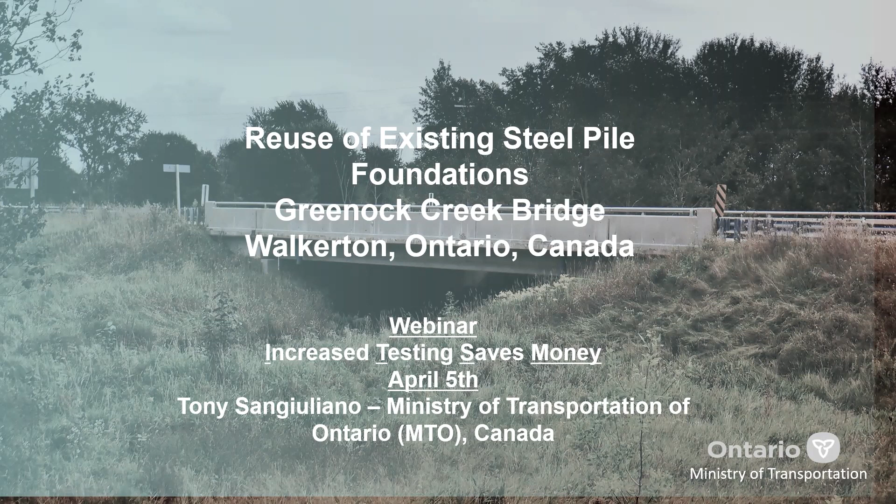What I want to do today is share with you not only a case study related to the reuse of existing steel pile foundations, but also slant the presentation towards the significance and importance of making smart investment decisions, and specifically, investing in testing.

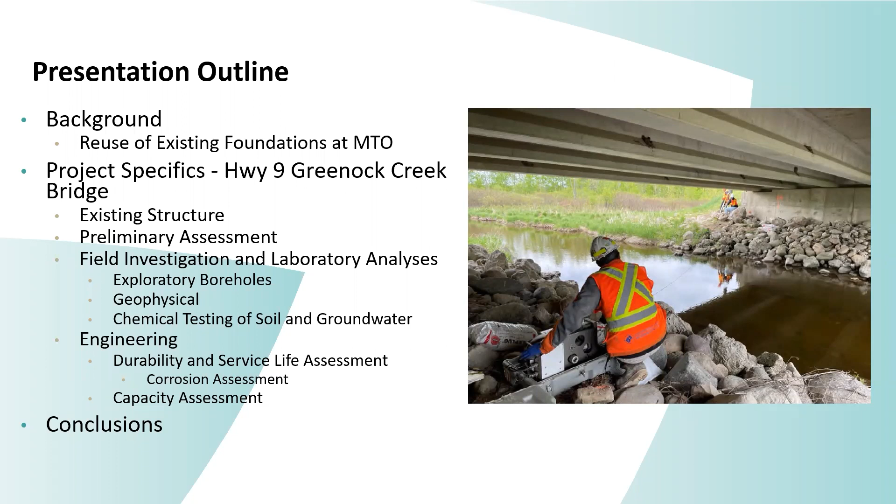Before I do that, as you see my presentation outline, the very first bullet, I just wanted to get the Ministry of Transportation of Ontario on the radar for you folks. I'd like to talk a little bit about our infrastructure and our commitment to sustaining it. Then I'll get into the details of the case study, a project in one of our five regions, West region specifically. There's a number of things I want to share with you, and then I'll make some conclusions.

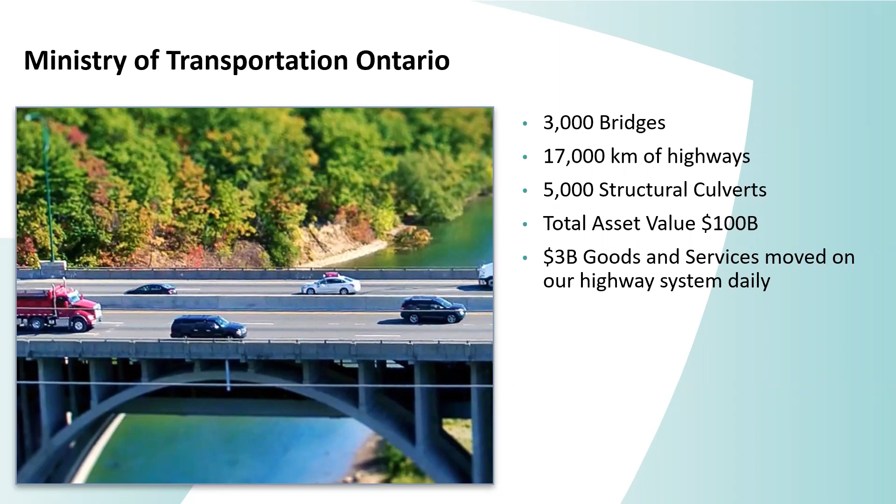With regards to our infrastructure, as you can see on the right-hand side, in our inventory we've got about 3,000 bridges, about 17,000 kilometers of highways, about 5,000 structural culverts, and about 50,000 non-structural culverts. Our total asset value is about 100 billion. We take a lot of pride in moving Ontarians safely, reliably, and efficiently, and in doing so, encouraging economic prosperity. That's why we move about $3 billion of goods and services daily on our infrastructure.

So a big part of our mandate, and certainly one of our priorities, is to sustain our infrastructure through smart investment decisions and innovation. Testing and investing in research type projects is something we take a lot of pride in.

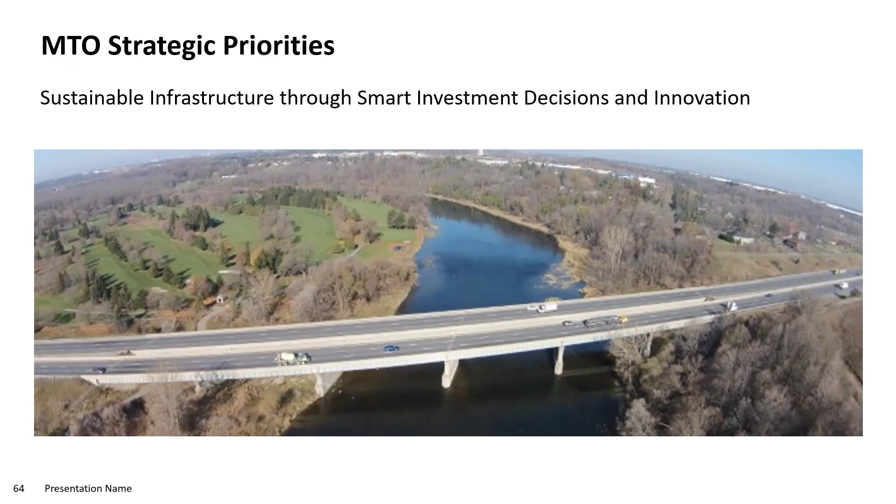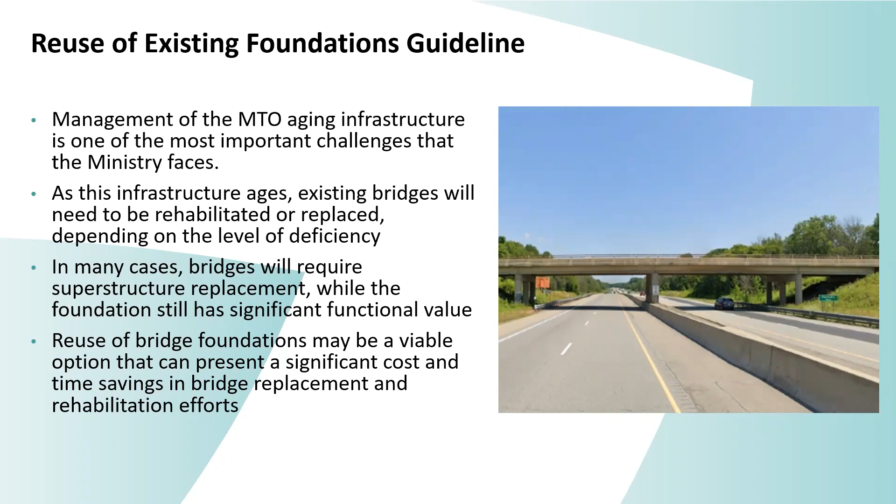One of the areas we feel is beneficial to pursue moving forward, and where we've gained some momentum, is looking at the reuse of existing foundations. With our infrastructure aging, we need new ways of doing things to be more cost effective and more responsible to our taxpayers. So one of the things we're doing is looking more and more into reuse of existing foundations, as opposed to just building new foundations and new structures entirely. With that, there are a lot of benefits: cost, minimization of traffic disruption, schedule, and environmental benefits as well.

So there's a process, and we've got a draft guideline that we've used and will continue to upgrade, because we take a lot of pride in our technical leadership. The process starts with a preliminary assessment, then you go through a risk analysis, a life cycle cost assessment (LCCA), and then a detailed assessment, which looks at the capacity, the extended service life, the durability, and the integrity of the particular foundation system.

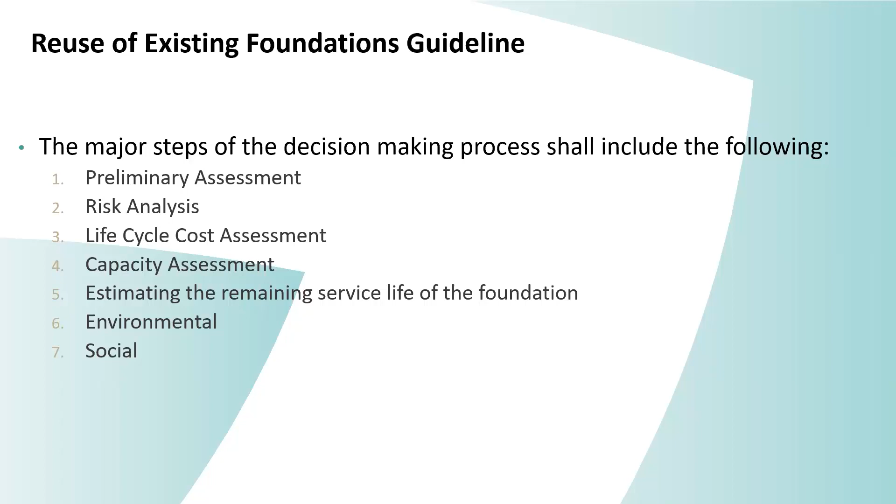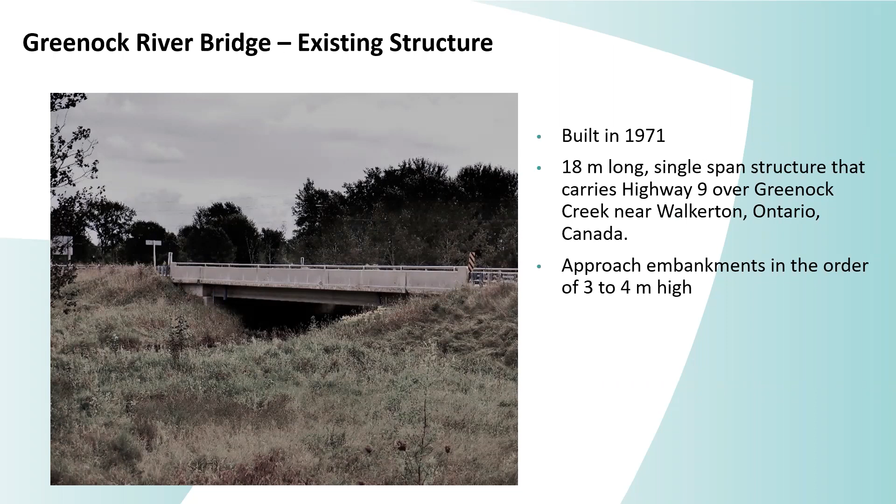So at this particular site, the Greenock River Bridge, it's an existing bridge. You can see by the photo that the superstructure is not in the best condition. It was built in 1971. It's a single span structure, about 18 meters long, with approach embankments about 3 to 4 meters high.

The existing abutments are founded on driven steel H piles, 11 at each abutment for a total of 22, about 8 meters long. The piles are battered, which is important as I will describe later. The piles were originally designed to carry a particular load: 70 tons, or in metric, 630 kilonewtons per pile.

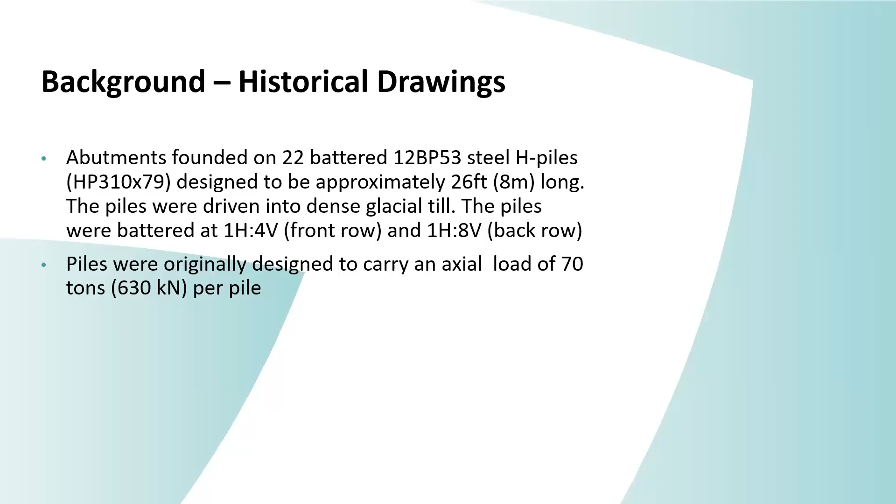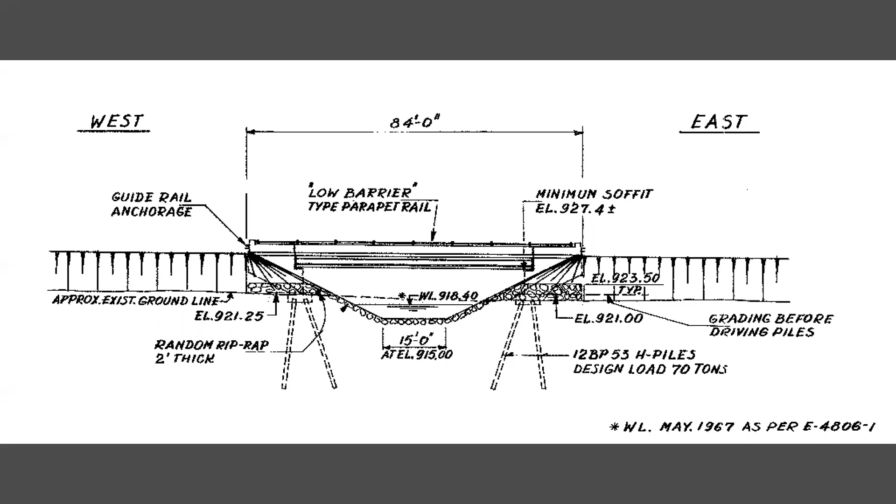The piles are 310 by 79 piles, our go-to foundation system in this neck of the woods, because of the availability and the conditions that we have here.

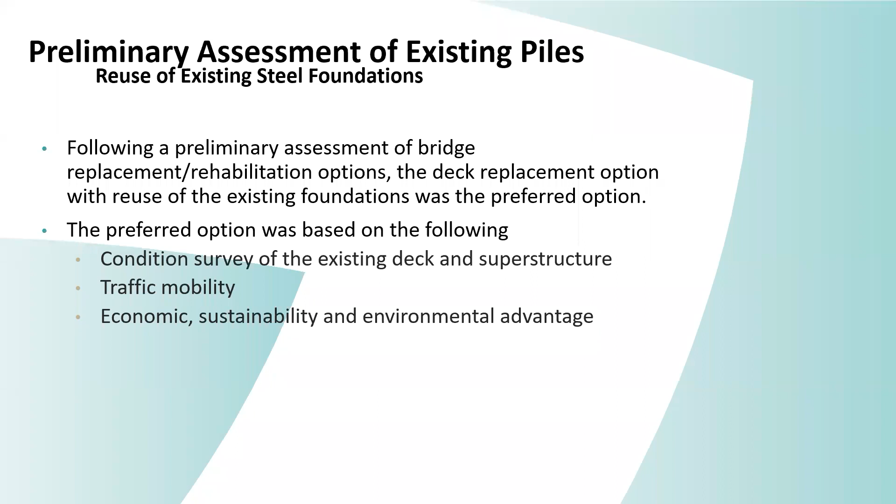So then we proceeded into the detailed assessment of the existing piles, and this is where the investment in testing comes into the picture.

At this particular site, as you can see by the close-up slide on the right, the preferred method to investigate existing piles is what we call a direct approach, where you try to expose the piles if the site and subsurface conditions enable you to do that.

But unfortunately, at this site, the conditions were challenging. As you can see in the foreground of the picture, there was water, and the subsurface conditions involved cohesionless soils, so we had an issue with dewatering requirements and challenges with temporary shoring systems.

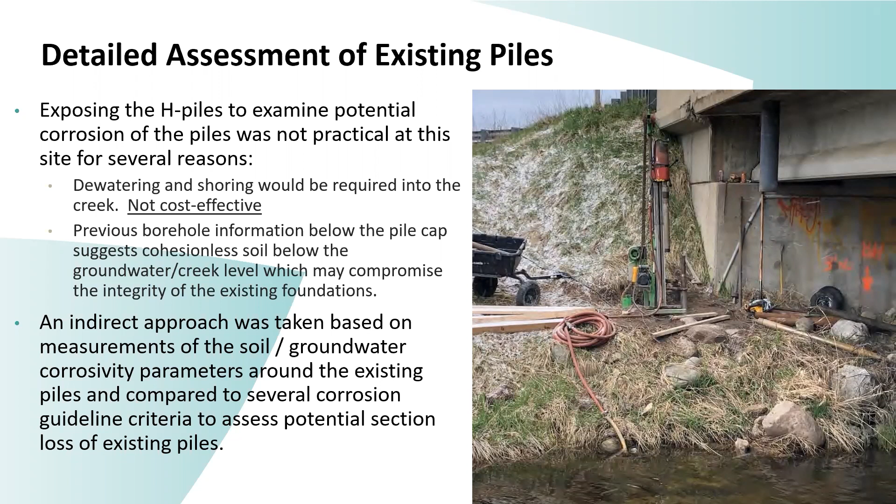So we chose an indirect approach to make an assessment of the existing piles, and I want to share with you what we did. It was a three-prong approach, and the first prong was the advancement of exploratory boreholes.

With the exploratory boreholes, we advanced a total of 6, as you can see here, the solid dots, and we had some previous boreholes as well. From these 6 boreholes, we were able to determine the subsurface conditions.

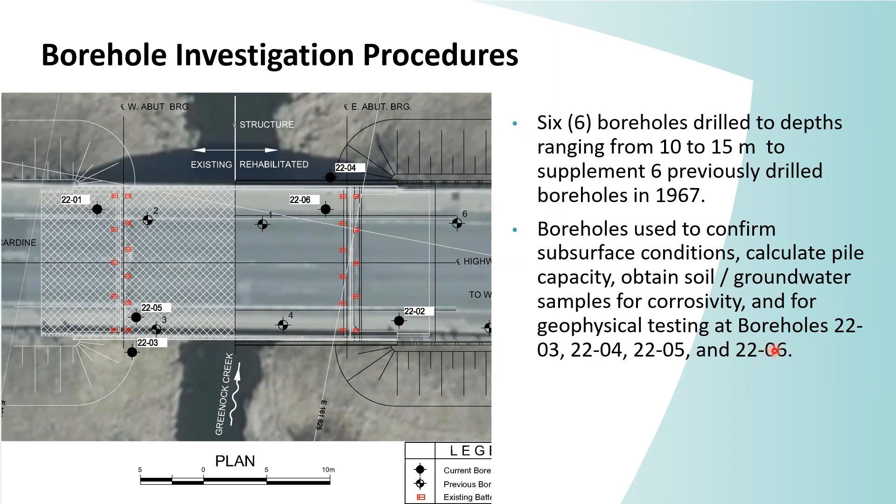We chose the selection of these borehole locations very carefully, because we coupled the exploratory boreholes with some geophysical testing at some of the borehole locations, specifically 03, 04, 05, and 06. I'm going to share with you what I mean in terms of selecting the locations and how we actually advanced the boreholes.

Some of the boreholes we drilled from the roadway surface, and we tried to get those locations as close to the abutment pile locations as we could, as illustrated in the slides on the left, where we advanced boreholes off the roadway. We used portable equipment, as illustrated here in the photo on the right, still trying to get as close as we can to the abutment to enable us to do the geophysical testing afterwards.

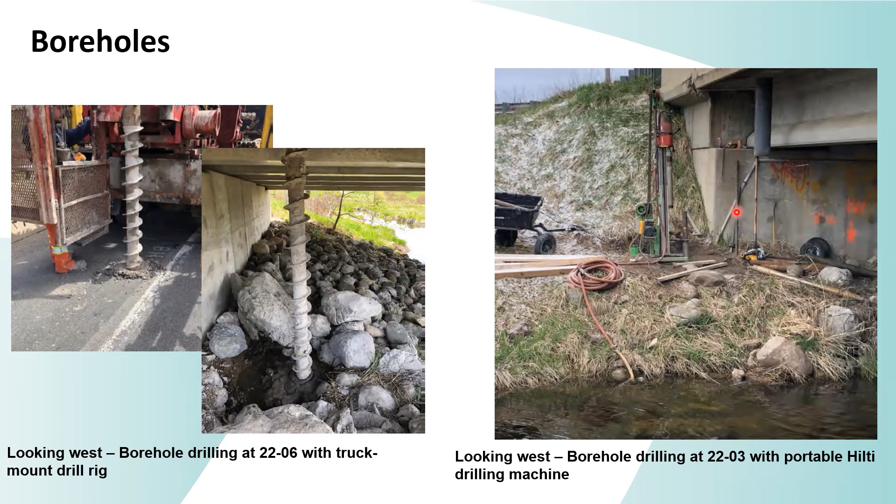In terms of the subsurface conditions, there needs to be a determination of them to assist in the capacity assessment of the pile, which I'll get into a little bit later, but also to assist in the service life or durability part of the assessment.

You could see on the slide here that the subsurface conditions determined were comprised of some fill, underlain by a thin layer of cohesive silty clay to clay silt, which was in turn underlain by a sand and gravel deposit. But the predominant deposit was a silty, sandy till of glacial origin, and you could see from the slide here that the piles in red are founded on that very competent silty sand till.

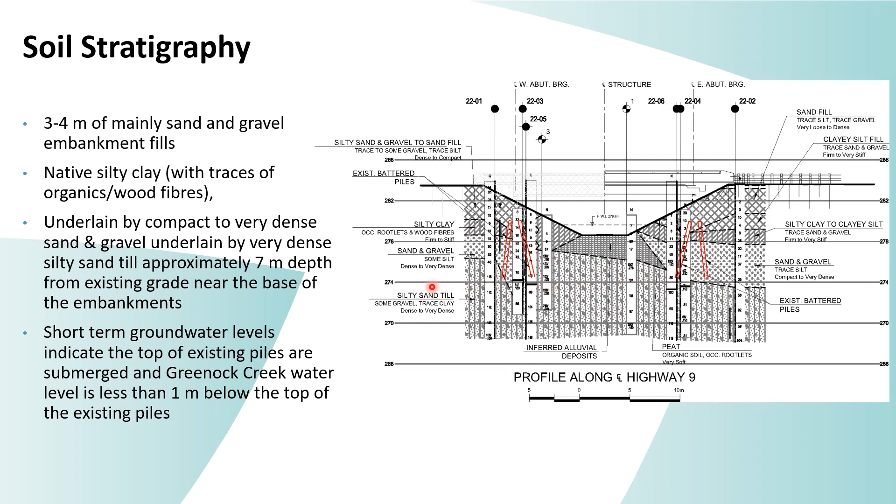Then we proceeded to the second prong of our testing, our investigation. What we did is we applied 4 different geophysical methods to enable us to determine the embedment length of the piles.

Unfortunately, we didn't have any as-built drawings. We had design drawings, and we kind of knew that the piles were 8 meters in length, but we needed to validate and verify that.

Consequently, we used 4 different geophysical methods: a parallel seismic method, a borehole magnetometer method, an electromagnetic method, and a natural gamma method. So we used the boreholes that we advanced, and then applied the different methods.

The boreholes were advanced below the expected tip of the deep foundations. The essence of all these tests is to look at variations going from the bottom of the hole. We put in a 2-inch PVC, grouted the annular space, and started from the bottom of the hole using either a geophone for the parallel seismic method, or a magnetometer for the borehole magnetometer method, going from the bottom and then in decrements upward to look at variations or changes with depth, so that we could ascertain the embedment lengths of the piles.

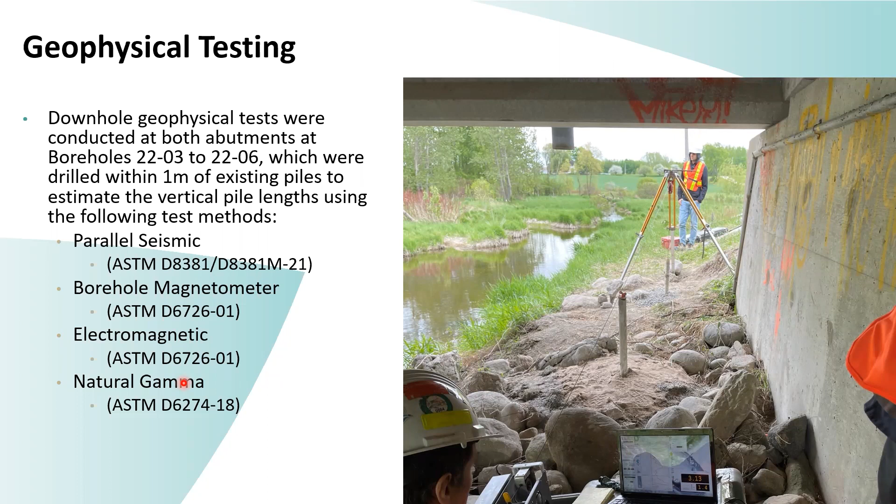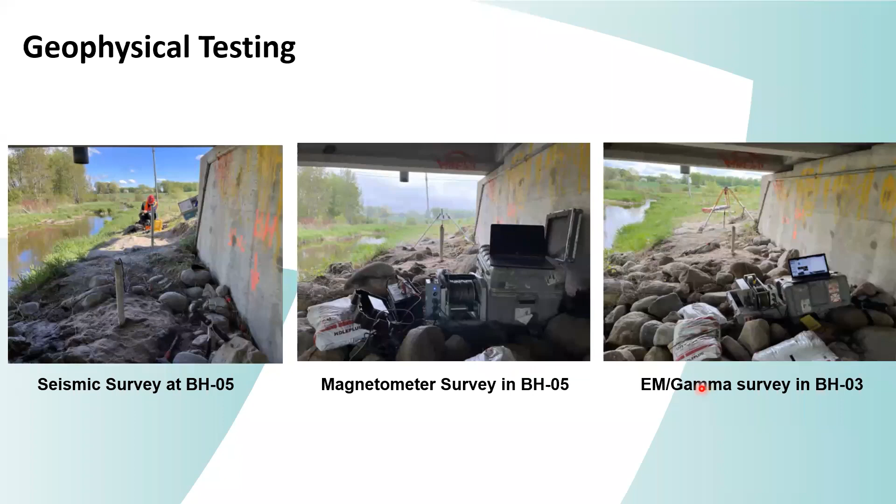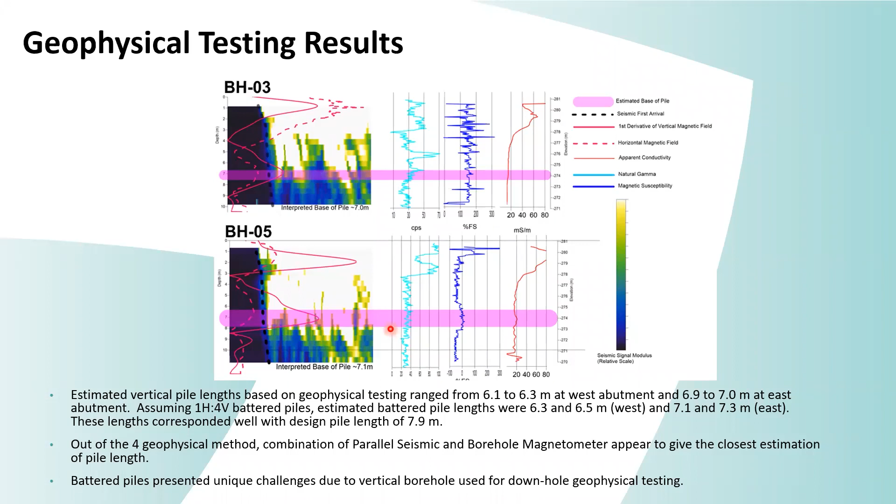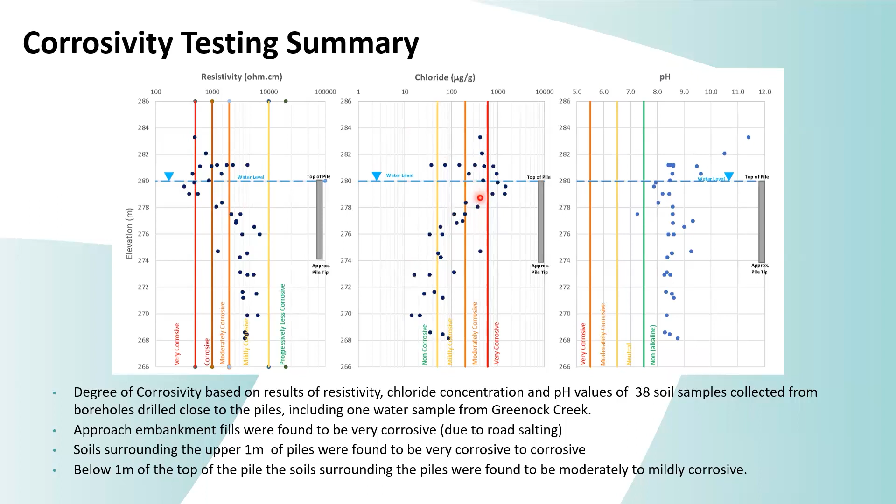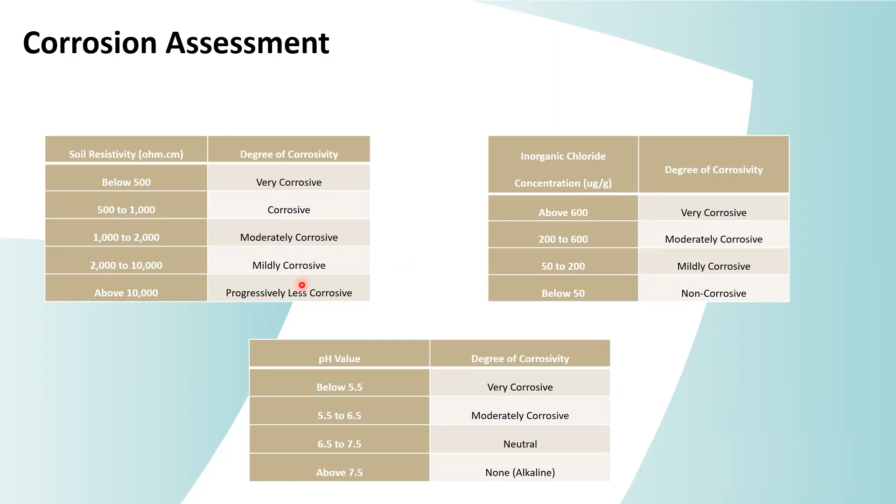From that, we were able to - this is actually the sources for plotting those lines, just for your information - come up with the identification of whether it was a corrosive environment or not for the different parameters.

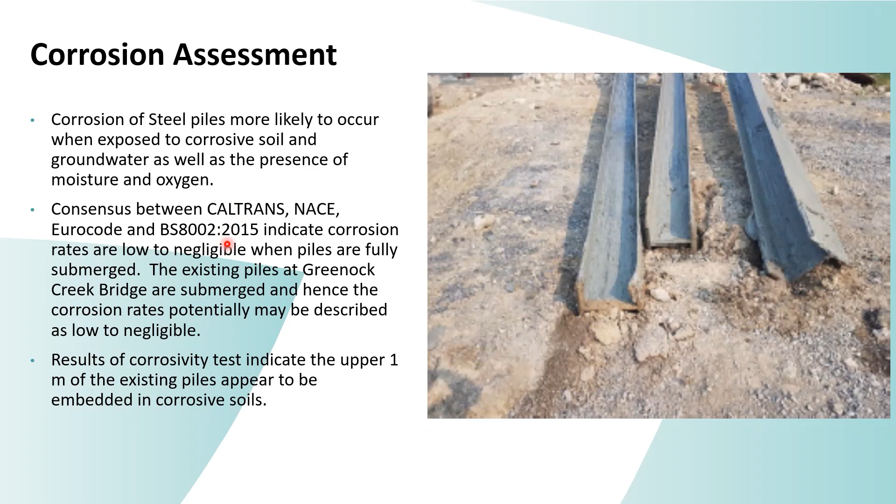From this, we made an observation and a conclusion in terms of whether these piles are in an extreme situation for corrosion moving forward, or whether we could live with it. Looking at the different codes—Caltrans, NACE, and British standards—

we were able to conclude that we felt comfortable enough, based on further analysis, to proceed. I'm going to describe that further analysis. With the corrosion assessment, we looked at Caltrans and a few other specifications and codes, and said,

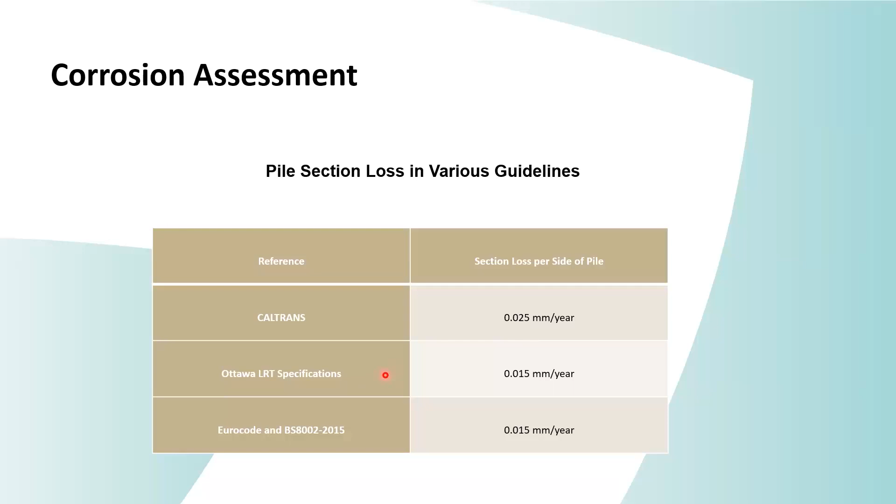So with the conditions that we had, we felt that going with 0.015 millimeters per year, we felt comfortable with that, so that we could calculate what the corrosion loss was during the existing service life, and then predict what the further corrosion loss would be moving forward.

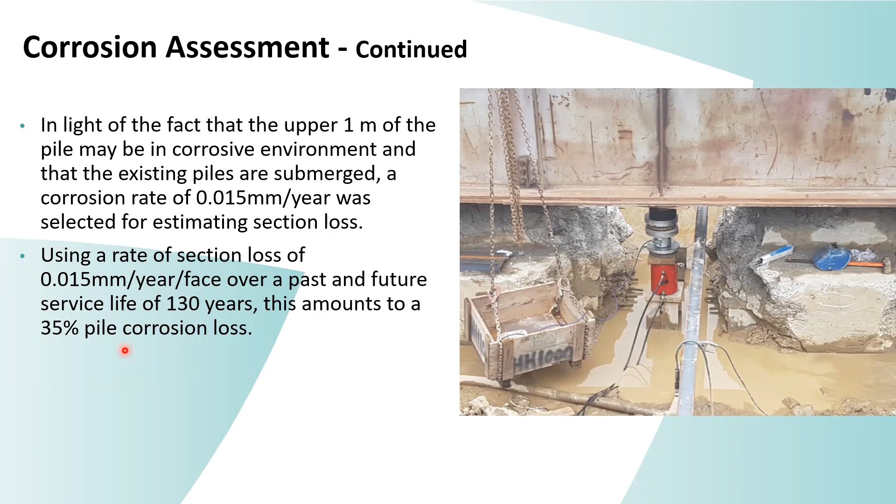With that calculation of 0.015 millimeters per year per face, we came up with a conclusion that there was a 35% corrosion loss, total past and future. With that 35%, knowing the grade and strength of steel, we calculated 790 kilonewtons from the factored strength of the pile.

Once we made that calculation based on a 35% loss, and looking at the demand, we concluded that we were good from a structural capacity perspective. And we did a similar assessment for the geotechnical capacity.

With the geotechnical capacity, we used empirical methods to compute the actual capacity of the pile, knowing that the pile derived this capacity from both shaft and tip resistance. We came up with our factored capacities, compared them again with the demand, and concluded that we were okay also from a geotechnical capacity perspective.

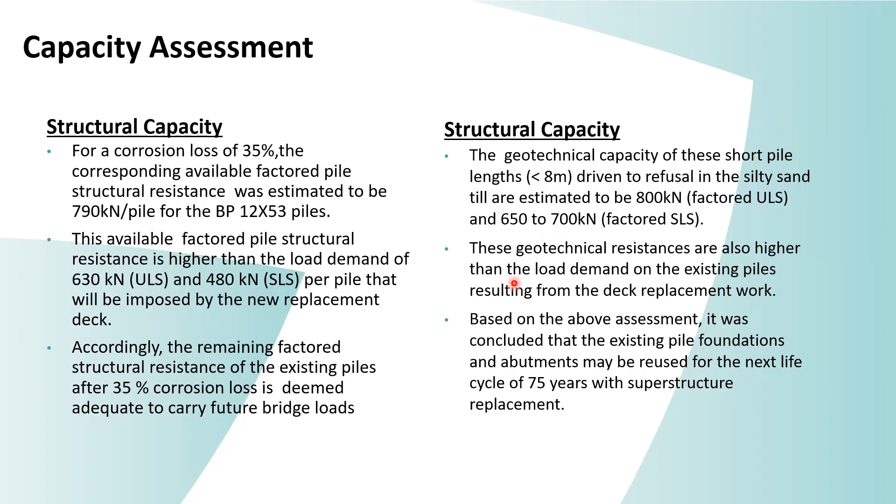So we were good to go from a service life perspective, a durability perspective, and a capacity perspective, and we've now proceeded accordingly to design the structure to replace the girders and replace the deck.

In fact, there was a meeting scheduled today that I could not attend because I'm here sharing this information with you, to finalize the contract package. So this is going to be tendered shortly.

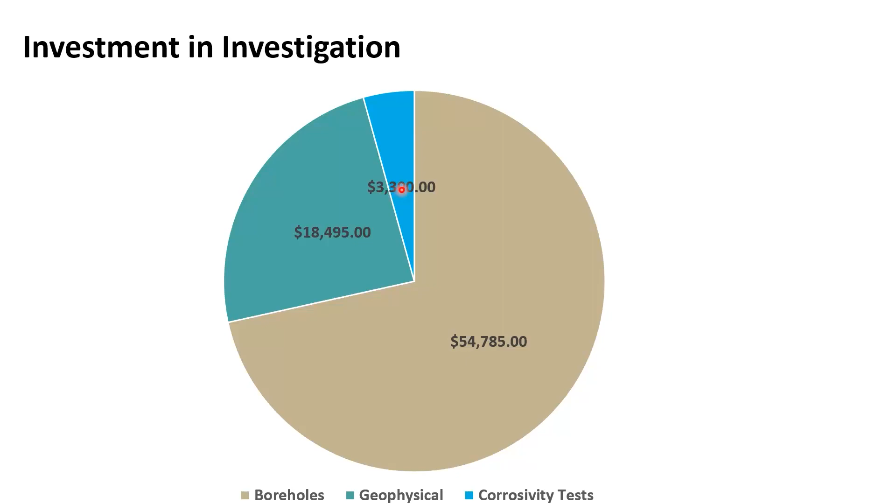So, conclusions. We concluded that using an indirect methodology is acceptable to make an assessment of existing piles.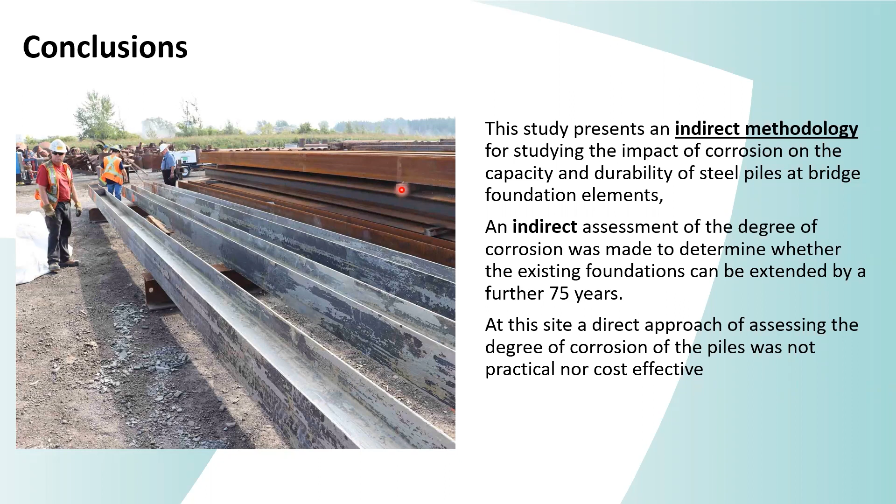We've concluded that it's cost effective to reuse existing piles. On this job, we did our calculation in terms of the savings compared to reuse of existing foundations versus building new foundations and a whole new bridge, and we came up with $500,000 in cost savings.

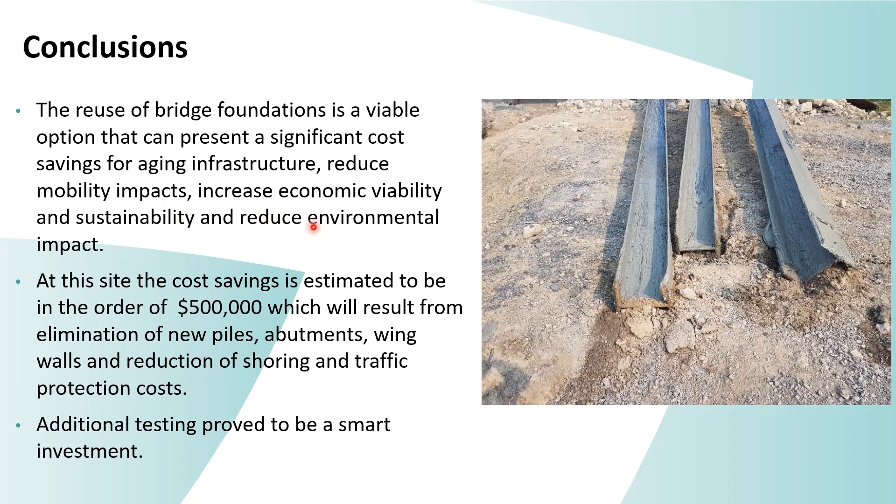The total investment was about $75,000, with some engineering and reporting maybe $100,000, but the net savings came to about $400,000. But there are other advantages too, in terms of reducing mobility impacts, traffic disruptions, and environmental and sustainability advantages as well.

So moving forward, it is our intention here at the Ministry of Transportation of Ontario to continue to invest in testing in general, and specifically when it comes to reuse of existing foundations. We've got a couple of projects on the radar where we want to expand and not only consider doing indirect testing,

but we're looking at doing some direct testing where we could actually locate and expose the piles, subject them to axial compression testing, similar to what we heard from previous presentations, and lateral load testing. Extracting the piles is something we're planning to do, and doing actual testing of the whole extracted pile to assess corrosion loss and evaluate durability. Of course, this will all be combined with determining the subsurface conditions.

So that is our plan moving forward. And that